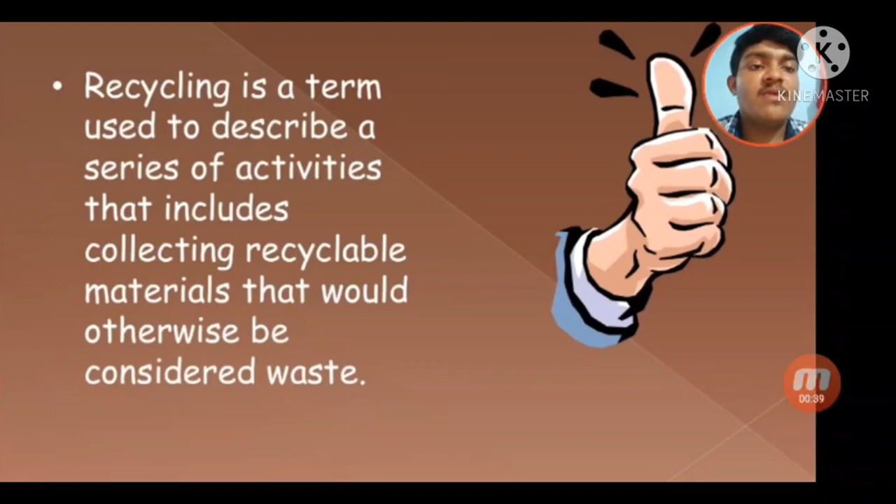Recycling. What is recycling? Recycling is a term used to describe a series of activities that include collecting the recyclable materials that would otherwise be considered waste.

Introduction. Construction waste: unwanted materials generated during the construction process, for example, demolished concrete fragments, bricks, pieces of wood, plastic waste, etc. Reuse: the process of using material again for the same or a different function, for example, using the coarse aggregate obtained from concrete waste for the preparation of fresh concrete. Recycling: the process of converting waste material into new ones to reduce waste of potentially useful materials.

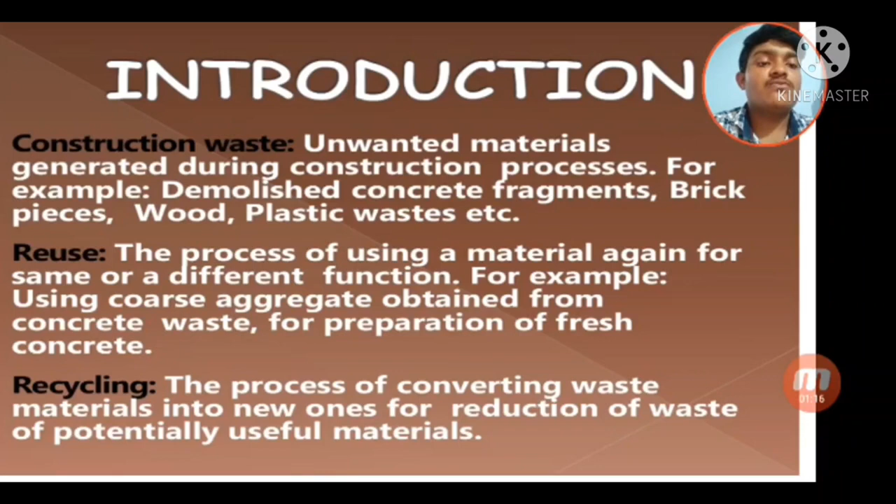Why concrete? It is a democratic material. It is low cost compared to steel and aluminum. Availability of raw materials: limestone and aggregates are naturally available. Versatility, adequate engineering properties.

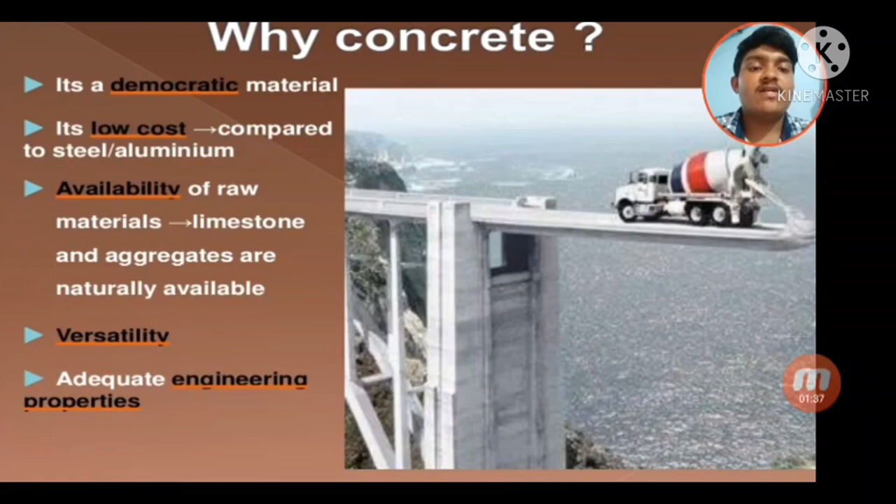When structures made of concrete are demolished or renovated, recycling is an increasingly common method of utilizing the rubble. Concrete was once routinely trucked to the landfill for disposal, but recycling has a number of benefits that have made it a more attractive option in this age of greater environmental awareness, more environmental laws, and the desire to keep construction costs down.

Concrete aggregate collected from the demolition site is put through a crushing machine. Crushing facilities accept only uncontaminated concrete, which must be free of trash, wood, paper and other such materials. Metals such as rebar are accepted, since they can be removed with magnets and other sorting devices. For recycling, the remaining aggregate chunks are sorted by size, and large chunks may go through a crusher again after the crushing has taken place. Other particulates are filtered out through a variety of methods including hand picking and water flotation.

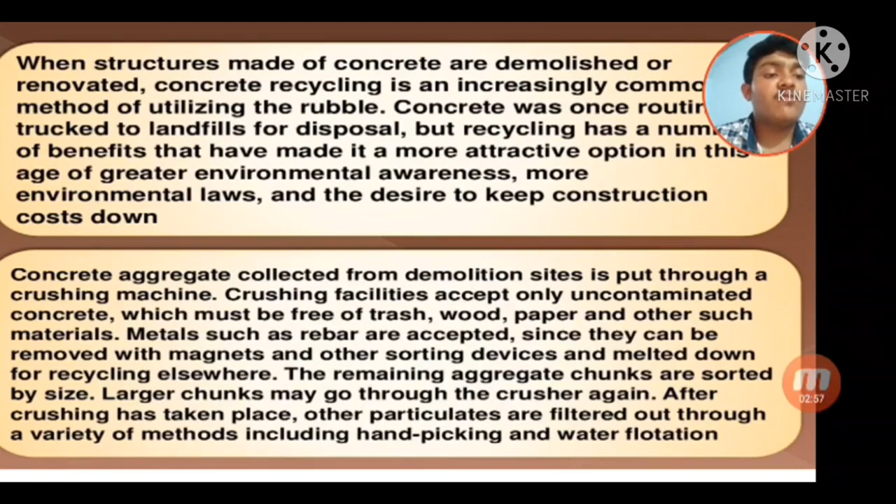Use of recycled concrete. Smaller pieces of concrete are used as gravel for new construction projects. Sub-base gravel is laid down as the lowest layer in a road, with fresh concrete or asphalt poured over it. The Federal Highway Administration may use techniques such as this to build new highways from the material of old highways. Recycled concrete can also be used as dry aggregate for brand new concrete if it is free of contaminants. Also, concrete pavements can be broken in place and used as a base layer for asphalt pavement

through a process called rubblization. Larger pieces of crushed concrete can be used as riprap revetments, which are a very effective and popular method of controlling stream bank erosion. With proper quality control at the crushing facility, well graded and aesthetically pleasing materials can be provided as a substitute for landscaping stone or mulch. Wire gabion cages can be filled with crushed concrete and stacked together to provide economical retaining walls. Stacked gabions are also used to build privacy screens in lieu of fencing.

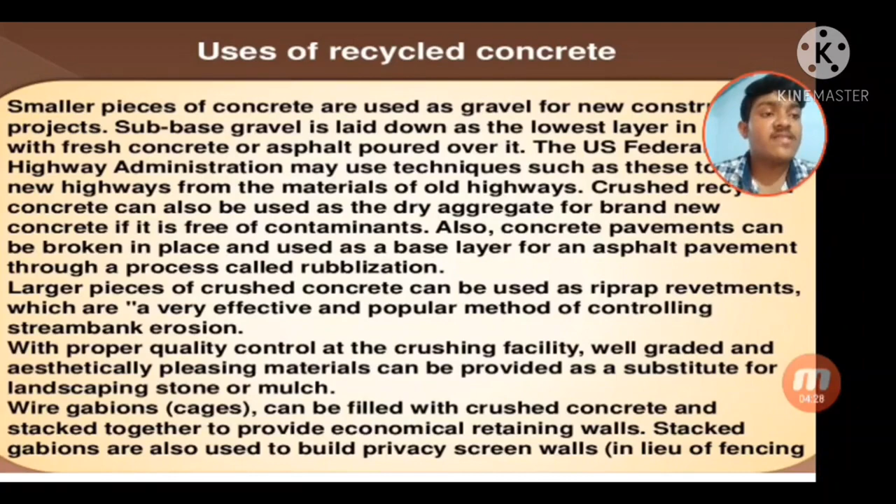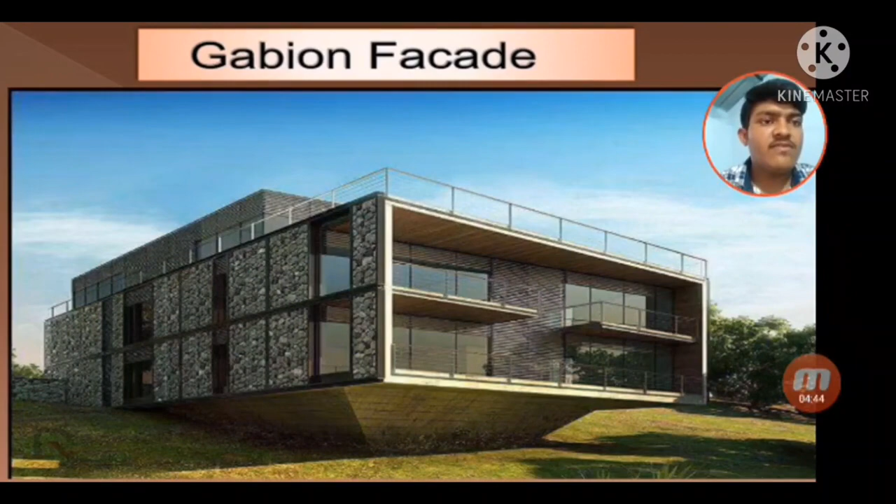Wire gabion cages. Gabion facade. Strength and durability of recycled aggregates.

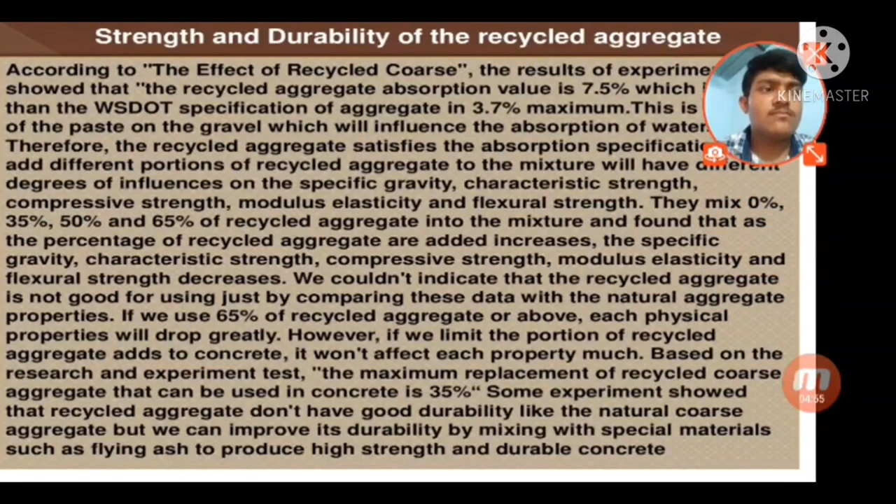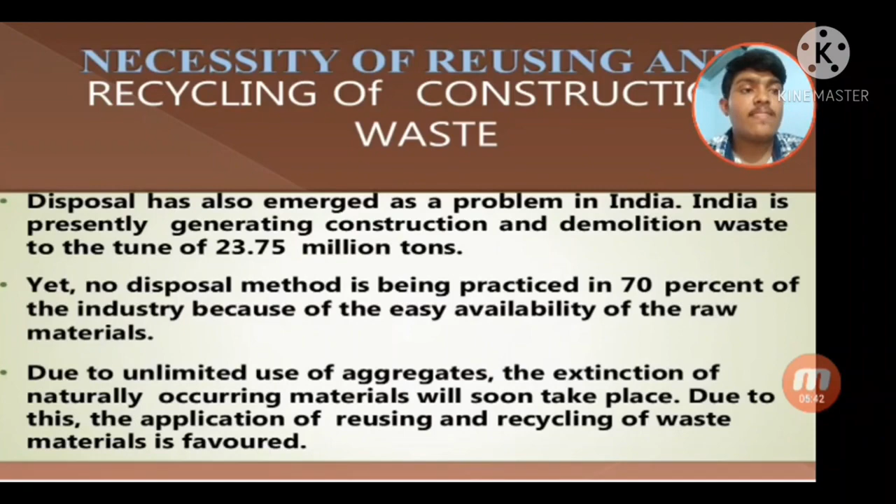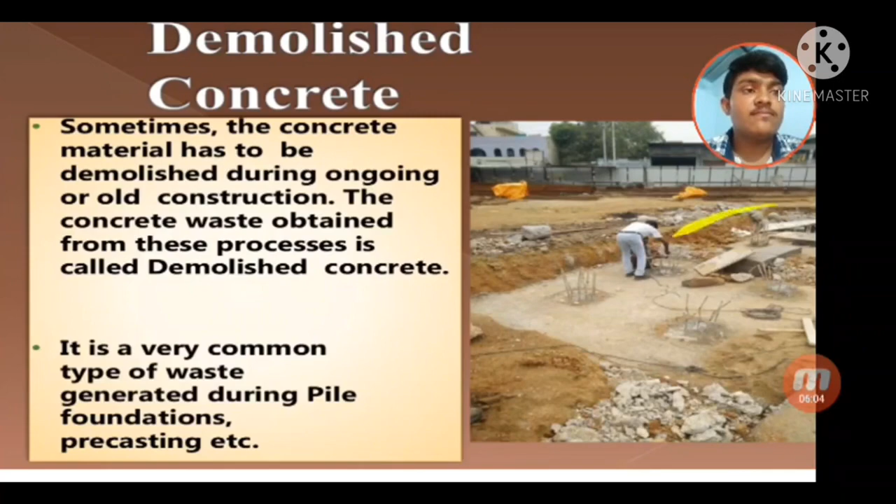Demolished concrete. Sometimes concrete has to be demolished during ongoing or old construction. The concrete obtained from this process is called demolished concrete. It is a very common type of waste generated during pile foundation, precasting, etc. Process of reusing demolished concrete: collection of the construction scraps from the site, classifying them according to their properties, sending them to the separation and treatment plant, differentiating the components, for example aggregate, treating them, and finally reusing them in constructing fresh concrete.

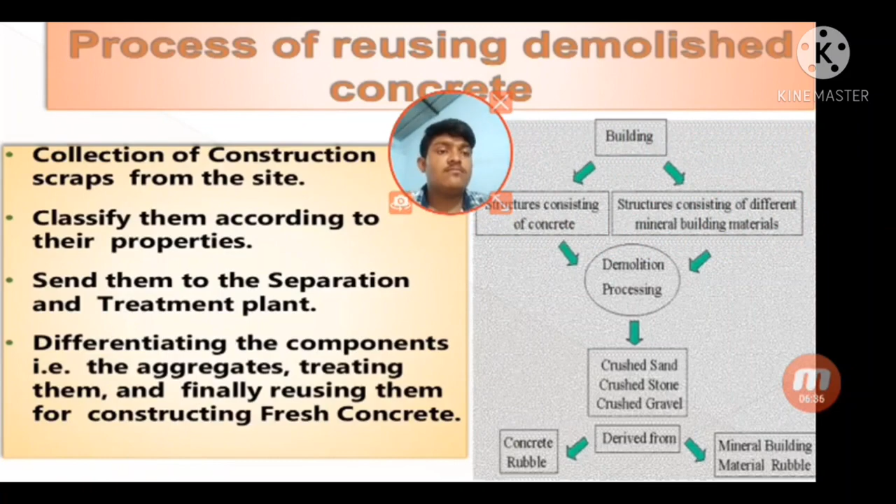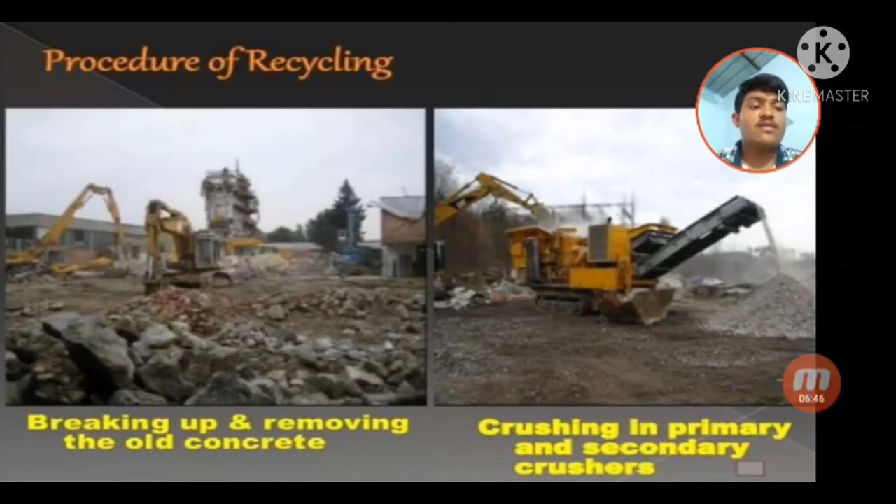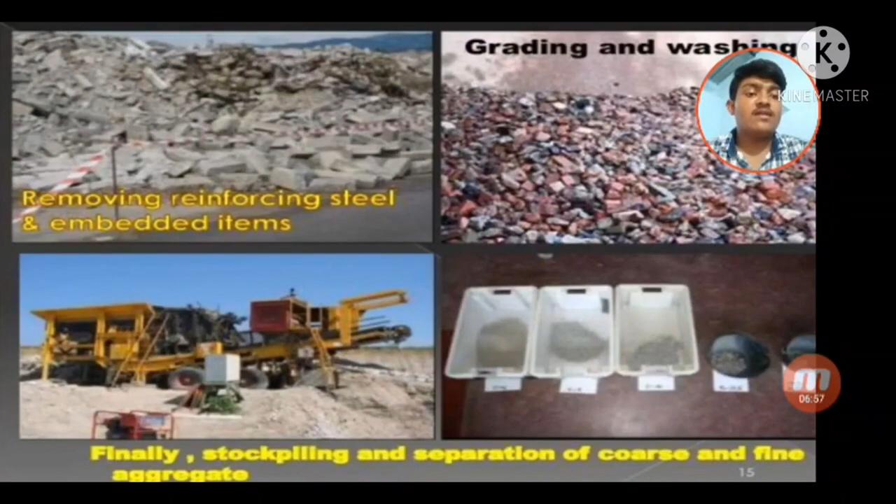Procedure of recycling: breaking up and removing the old concrete, crushing in the primary and secondary crusher, removing the reinforcing steel and embedded items, and finally stockpiling and separation of the coarse and fine aggregates. Technology: recycled aggregate refining method. Application of recycled concrete in Japan. Old office building, 7 stories, concrete lump 10,000 tons, whole quantity 80,000 tons. New office building, 38 stories, recycled coarse aggregate 3,000 and recycled concrete volume 5,000, used as BF-1F slab.

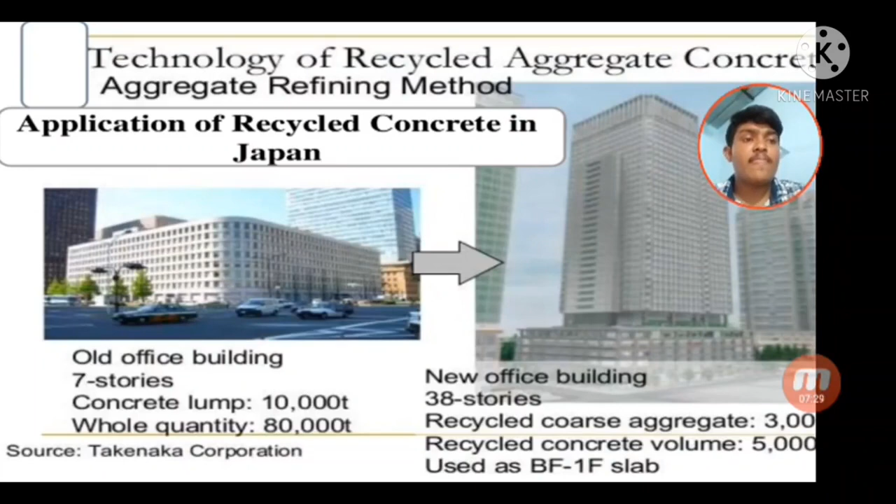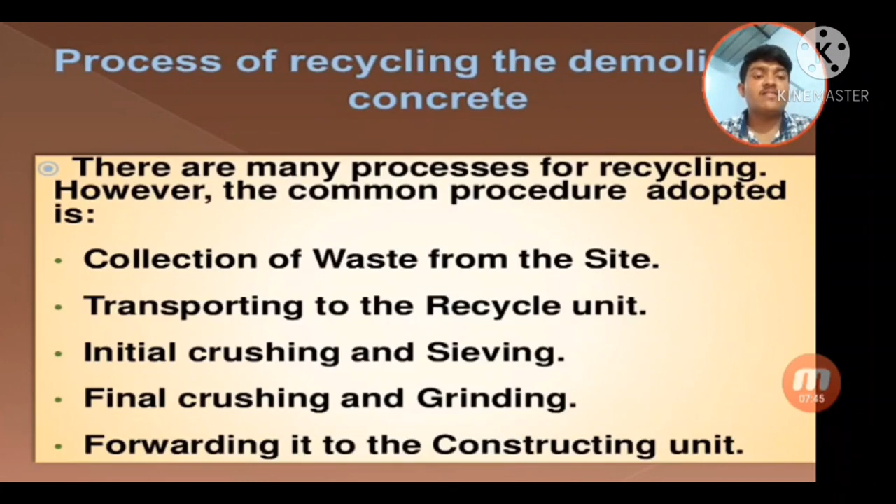Process of recycling demolished concrete. There are many processes for recycling. However, the common process adopted is collection of the waste from the site, transporting it to the recycling unit, initial crushing and sieving, final crushing and grinding, and forwarding to the construction unit.